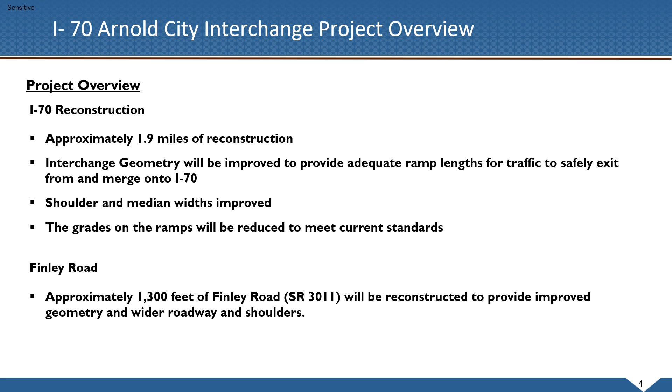The project is currently in the final design phase of project development. Final design will be completed in late 2022, and PennDOT expects to advertise the project for construction at the end of 2022. The current schedule anticipates that PennDOT will review the bids and select a contractor in January or February of 2023, and construction will begin in spring of 2023.

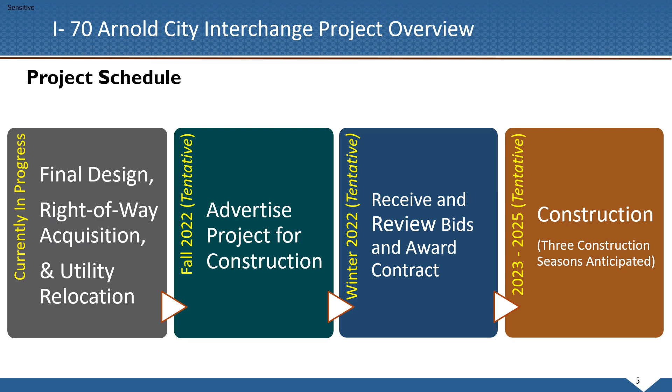1.9 miles of the I-70 main line will be improved. The improvements will include full-depth pavement replacement, wider medians and shoulders, and upgrades to drainage and stormwater facilities. Additionally, 2 overhead structures will be replaced to provide proper clearance over I-70.

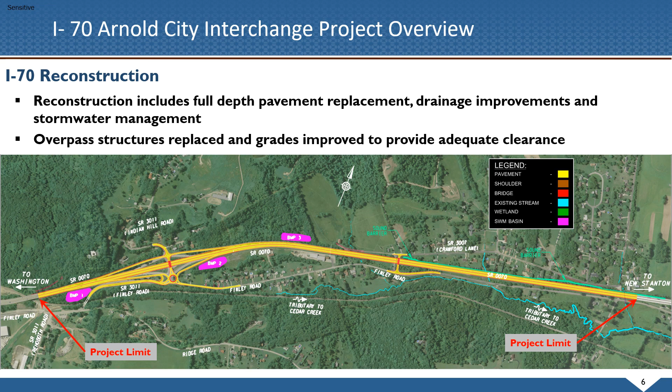The typical section for I-70 will be upgraded to provide a 10-foot wide median, 2 12-foot wide travel lanes in each direction, and 12-foot wide outside shoulders. The improvements will make this section of highway similar to the sections of I-70 that have been reconstructed to the east and west.

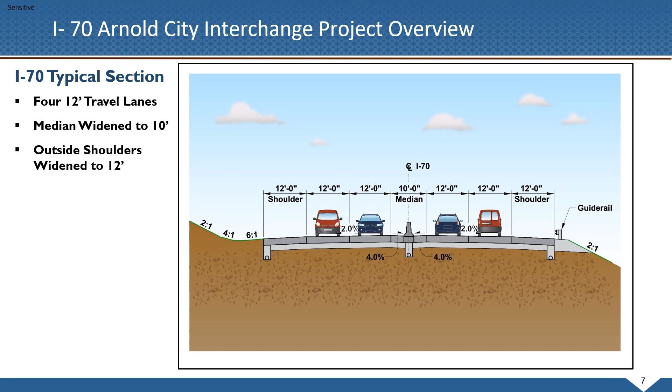The existing Diamond interchange will be reconstructed in a similar configuration with longer ramps to improve safety for vehicles exiting from and merging onto I-70. Additionally, the existing steep grades on the ramps will be reduced to meet current standards. The biggest change will be the addition of a roundabout to the south of the interchange at the intersection of Indian Hill Road and Finley Road.

This interchange provides access for the majority of trucks traveling between I-70 and the warehouse and light industrial facilities along Finley Road to the west. The existing T intersection is located close to the eastbound ramps and does not operate efficiently. The roundabout will improve efficiency and safety at this intersection by allowing continuous traffic flow. An auxiliary ramp between the eastbound off-ramp and Finley Road will allow vehicles making that turn to bypass the roundabout and further improve the efficiency.

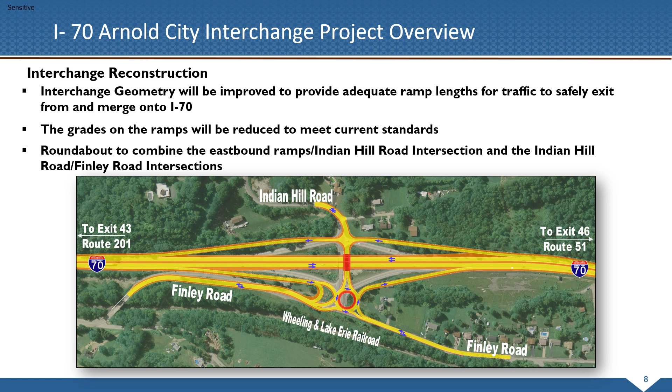As noted previously, 2 overhead structures will be replaced to provide adequate clearance. These structures are the Indian Hill Road Bridge at the interchange and the Crawford Lane Bridge approximately 7/10 of a mile east of the interchange. Both of these structures have damage from being hit by overheight vehicles in the past.

The Indian Hill Road Bridge will be constructed slightly to the east of the current location to provide better alignment for the ramps and roundabout. The Crawford Lane Bridge will be constructed approximately 50 feet east of its current location to allow traffic to continue to use the existing structure while the new bridge is built.

In addition to these bridge replacements, a new retaining wall will be built between the new roundabout and the railroad cut below, and an existing culvert will be extended to allow for the wider I-70 typical section.

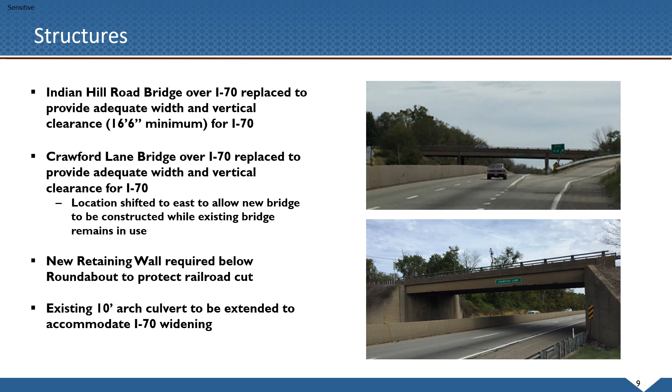Research and fieldwork was performed during preliminary engineering to identify potential environmental concerns along the project corridor, and the project received environmental clearance in December of 2019. The Waterways Permit and National Pollutant Discharge Elimination System, or NPDES permit, are currently being prepared for submission to the Pennsylvania Department of Environmental Protection and the Westmoreland Conservation District.

In conjunction with the I-70 State Route 51 interchange project, part of the stream impacts associated with the Arnold City interchange project will be mitigated with improvements to Cedar Creek and Cedar Creek Park. The remainder of stream impacts, along with wetland impacts, will be mitigated in State Game Lands 297 in Washington County.

The project will include 3 new stormwater management basins. Other drainage improvements include new inlets, pipes, ditches, and swales.

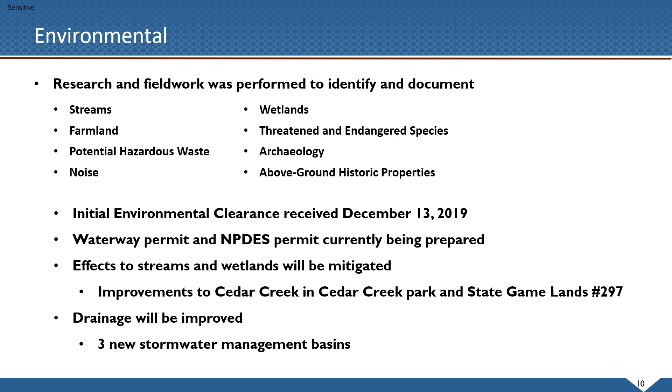Noise studies were conducted along the corridor, and a noise impact analysis report has been prepared for review by the Federal Highway Administration. The findings of the report indicate that noise abatement is warranted, feasible, and reasonable to construct for one area along the north side of the project from the Crawford Lane overpass to the eastern end of the project near Nichols Hill Road. No other areas were determined to be feasible or reasonable to construct.

Once concurrence on the report is received from the Federal Highway Administration, a separate meeting will be held with the affected property owners.

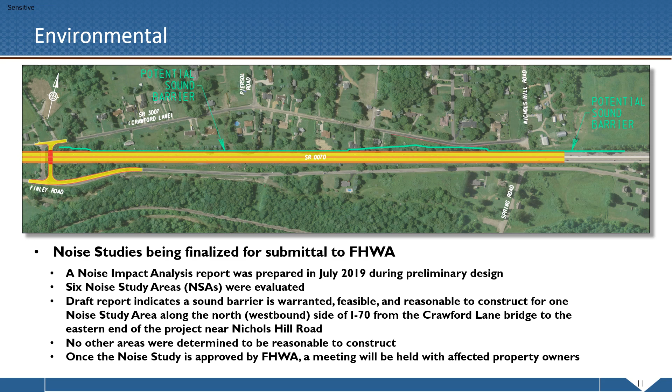During the next year, activity will begin to relocate various utilities along the corridor prior to construction. Other utility relocations will occur during the construction of the project so that the work can be coordinated with reconstruction of Finley Road and construction of the proposed roundabout.

A majority of the overhead facilities owned by West Penn Power, Verizon, and Comcast will be moved prior to construction. An underground gas transmission line that crosses under the highway will also be moved prior to construction. Most of the relocations of the water and sanitary sewer lines will occur during construction of the project.

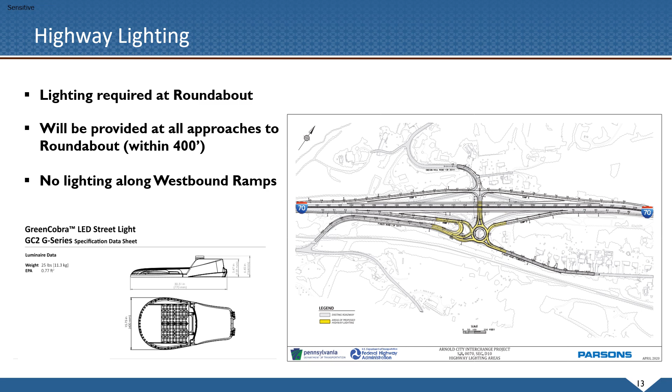In accordance with Federal Highway Administration guidelines, lighting will be provided at the roundabout and the approaches to the roundabout. Lighting is not required along the ramps or any other locations on the project.

It is anticipated that this project will require 3 construction seasons to complete. The adjacent 51 interchange project will require 4 seasons and is scheduled to begin 1 year earlier, meaning that the projects will likely be completed in the same year.

Detours and lane closures will be coordinated between the projects in order to minimize impacts to traffic as much as possible. Both projects will maintain 2 lanes of traffic on Interstate 70 except for short-term closures to allow for bridge demolition or construction and other limited construction activities.

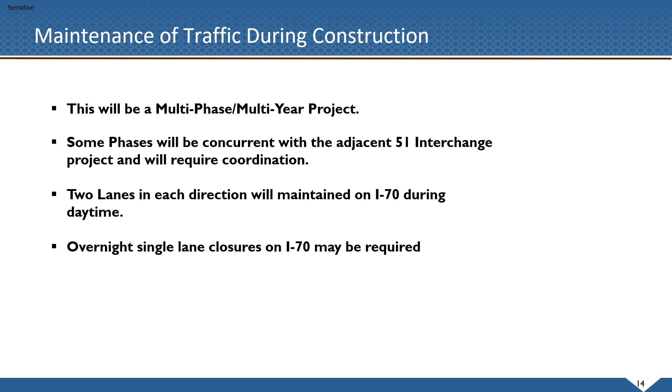The first phase of construction will require closure of the westbound shoulder through the length of the project and the eastbound shoulder at the 2 overhead structures. Additionally, the westbound ramps will be closed and traffic will be detoured.

A temporary connection for Finley Road will be constructed to allow traffic to continue to use the eastbound ramps, and minor modifications will be made at Exit 43, State Route 201, to accommodate the additional traffic that will use that exit. During this phase, both overhead bridges will be replaced, the retaining wall along Finley Road will be constructed,

the roundabout will be completed, and the culverts under I-70 will be extended. This will allow the lanes to be shifted as needed for the remaining phases.

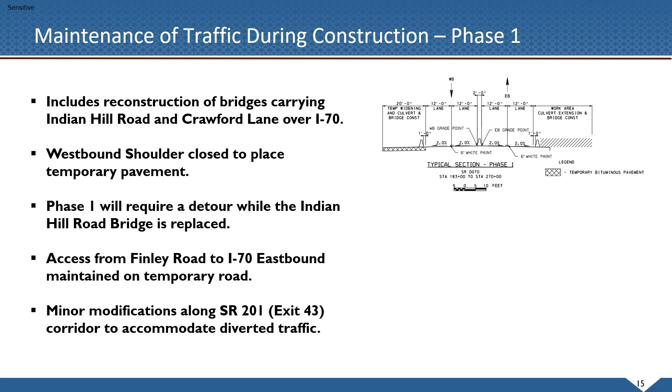During Phase 2, traffic will be shifted onto temporary pavement placed along the westbound lanes during the first phase. Construction of Interstate 70 will then be completed working from south to north through the remaining phases. Temporary connections to the ramps at the Arnold City Interchange will allow traffic to utilize the interchange through these remaining phases.

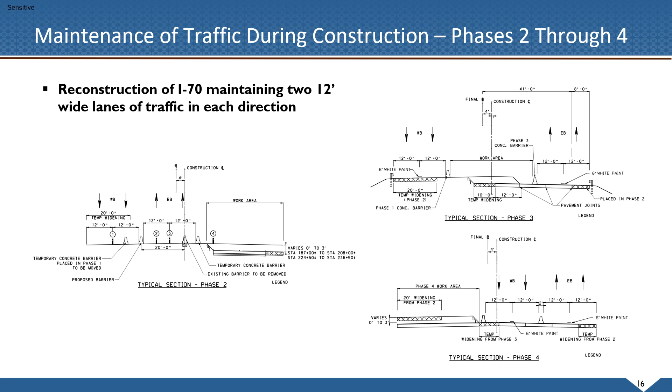This project is one of many upgrades along Interstate 70 between the West Virginia state line and the Pennsylvania Turnpike in New Stanton. To learn more about these improvements, please visit the I-70 project's website at the link provided. To learn more about roundabouts and their benefits, please visit the PennDOT and FHWA websites at the links provided.